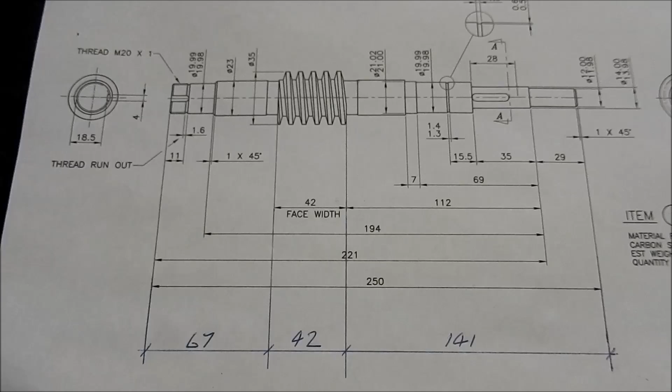Alright guys, since we've got the VFD up and going, we might finish off the transmission gear. Before we do go into the slides, this is the actual worm shaft. I've had to go back and do a modification to this. When I originally drew this, I drew it from the spec that I got from the eBay seller before I actually got the thing, and drew it up.

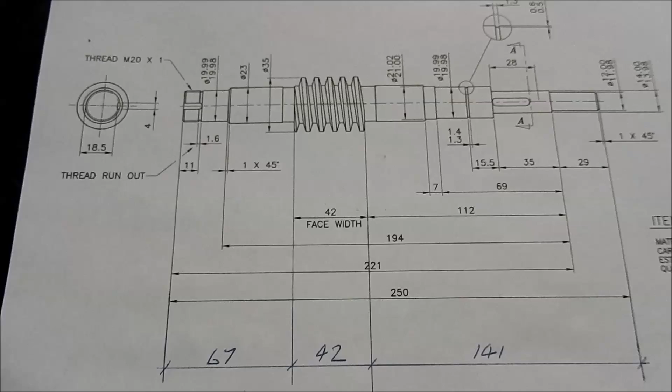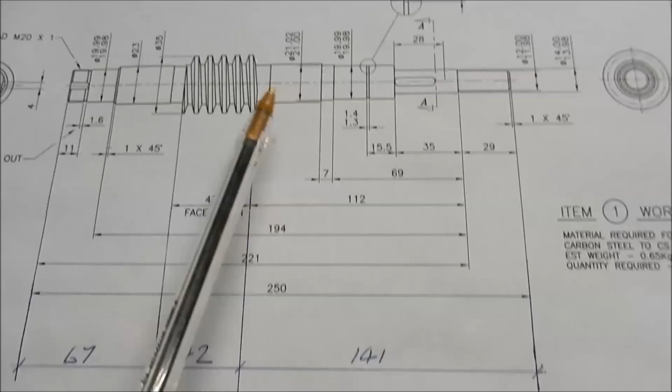But when I've actually gone to measure it now, the face width isn't 50, it's 42. So I've had to adjust everything sort of around that a little bit, which is fine. It's not going to affect the operation at all as long as we know about it. I've also lengthened it by about 2mm, which means I can use the stock length on this side without having to do any major machining.

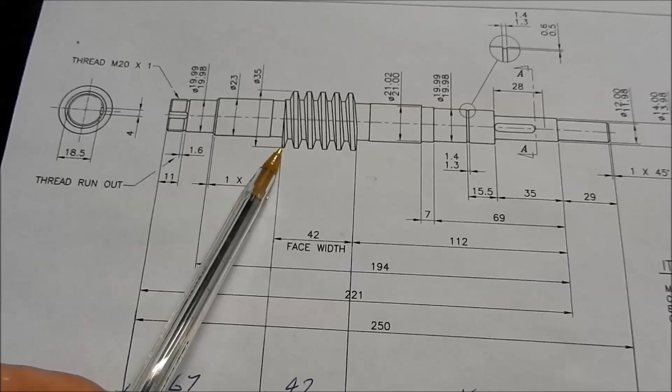I've got this set up in the lathe at the moment between centres just to see what the centres are like that are in here from the manufacturer. The important concentric face that I want to work to is actually the worm. Everything else can follow on from that. So I've got this set up between centres.

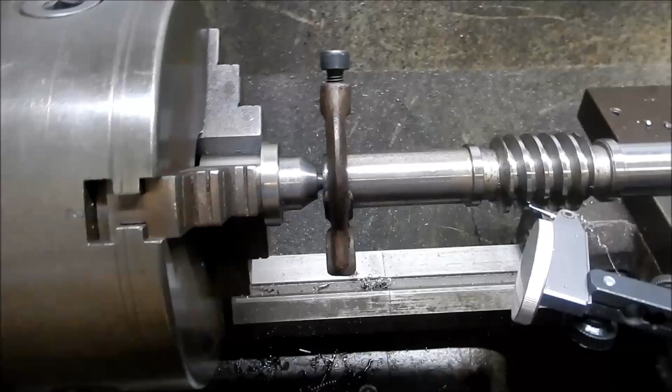I've actually just machined this centre to the 60° inclusive angle, so it's dead plumb with the centre line of the lathe. I've got my little lever indicator sitting on the worm, and I'm about 0.1 of a mil out of concentricity with that worm. So I'm not real confident about their centres.

So what I'm going to do is I'll go back to setting this back up in the chuck. I was a lot closer when I had this set up in the chuck. I was within about 0.03, I reckon. So we'll go back to the chuck to hold it, and we'll start machining up this long end here. So obviously their centres aren't quite where they should be, but that's okay.

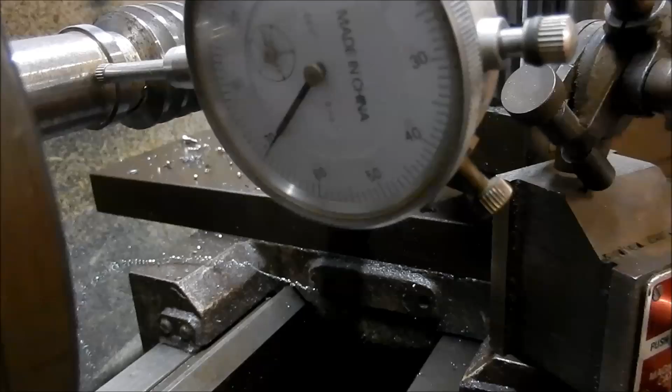Alright, so I've set it back up in the chuck. You can actually see this a little bit better. So if I run it round, well, it's less than half a thou. So I'm going to leave it at that. That's where we'll do our machining up at this end, so I'll get started on that. Right, so I'm happy with that concentricity. That's pretty spot on. Righto, we'll rough this out. We'll leave it a ½ mil or so oversize on all the diameters.

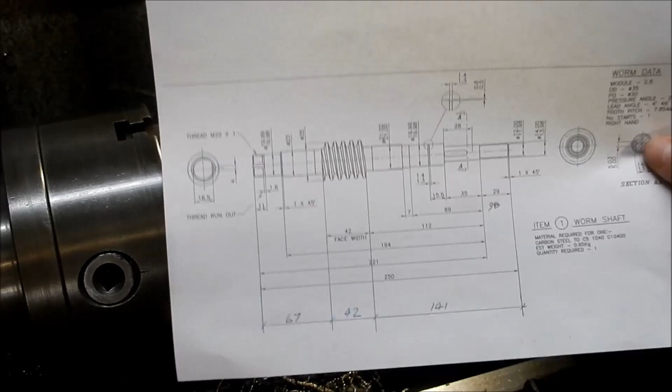Hope you can see that. So this is our bearing diameter just here. I'm going to make that a nominal 20mm, just so that bearing cone is just a very, very light push fit onto that. Other ones aren't so critical, we can match them up, but that's for our drive pulley. And this is a little extension I'm going to put off here in case I want to put some sort of handle or notch wheel or something like that on it, just to rotate it by hand.

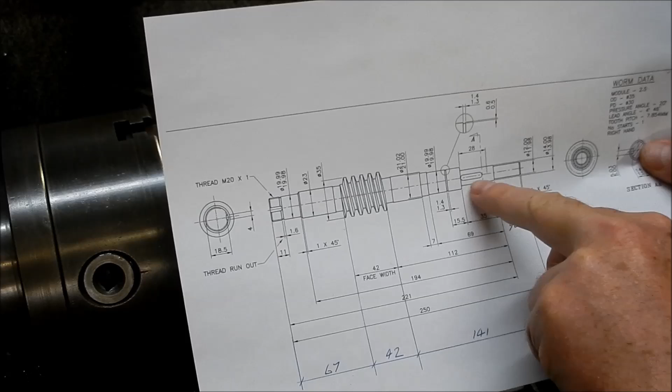This diameter up here is just a normal 23mm clearance, nothing critical. This is where we're going to put a little punch out washer onto here, so normal 21 on that. But this will be our critical dimension here. So anyway, we'll start roughing out each of the step sets until we come on down to get ready for finishing.

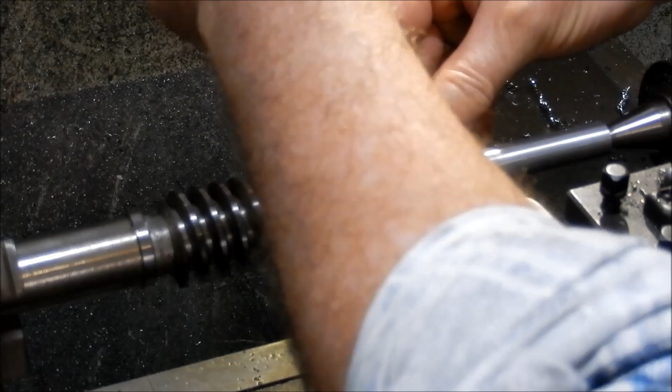Right, we'll set up for the finishing passes now. I've dropped my feed rate back. I actually found a good fast feed rate where it doesn't sound like the feed gearbox is going to destroy itself, so I've got a good combination I've just written down. I'll keep that. Rightio, so we're at 20.48, and our target size is 20 millimeters. So we've got 240 come off the radius.

Right, got 1, 2 left to go. I'm going to bring that down to the final bits. So take off 4. Right, we've got 0.025 left to go. Go on to the next diameter. Just a little punch out washer. Let's go 0.1 on that one.

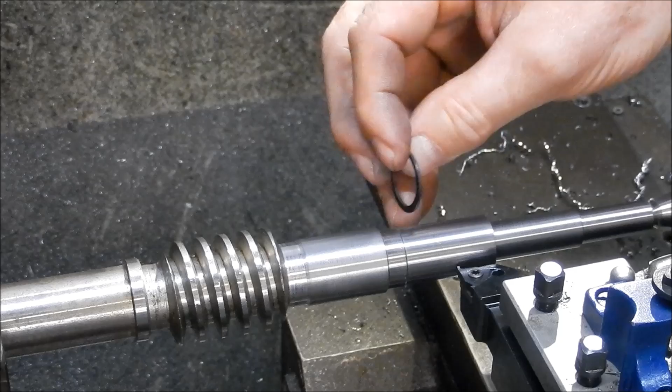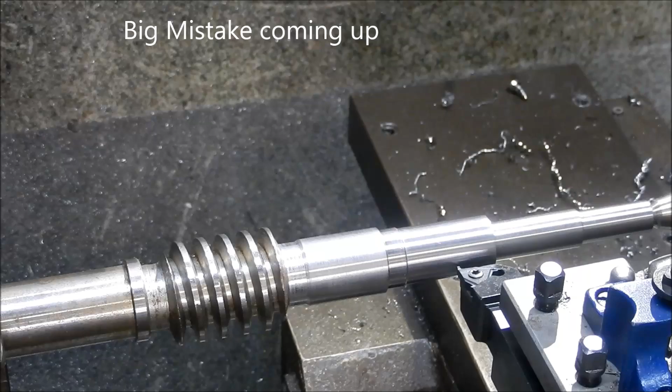Now I've measured the circlip and it's coming up at 1.15, so I want to make that a fairly tight fit. I'm actually going to make that 1.2. I'm going to tighten it up a little bit and we'll go to the maximum. Yeah, we'll go to the 1.3 depth anyway to get that little circlip into place, and then we've got a spacer washer between that and the bearing face. So let's see how we go. Excuse my arm, I'll just take my speed down a little bit.

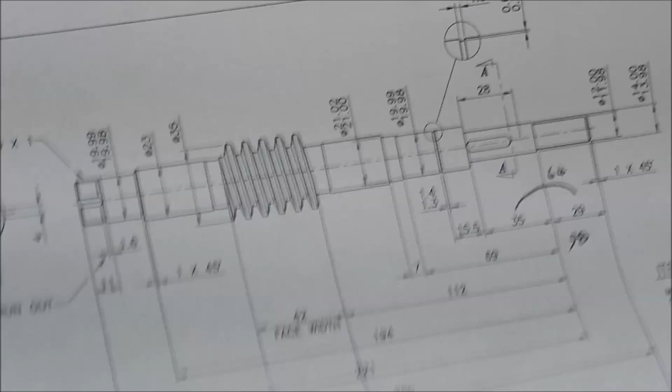Right, we'll try that on. Yep. Oh, jeez. What have I done there? Oh gosh. I'm reading the wrong... Should have gone 0.5. Alright, well, I'm not going to worry about that too much because it's not doing anything critical for us. It's just got a backup washer against it. So it's just a little bit of play in that. Yep, I think I'll leave it. Oh, bad mistake. Alright.

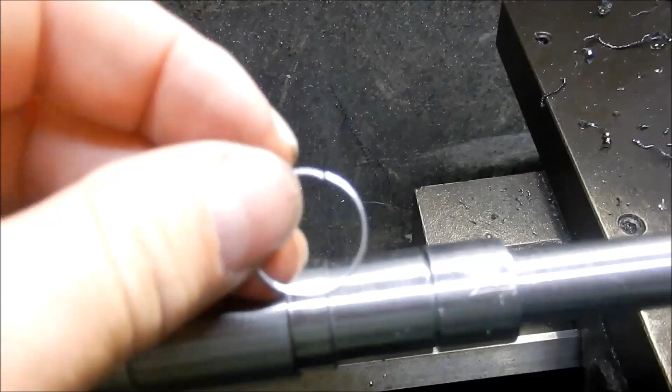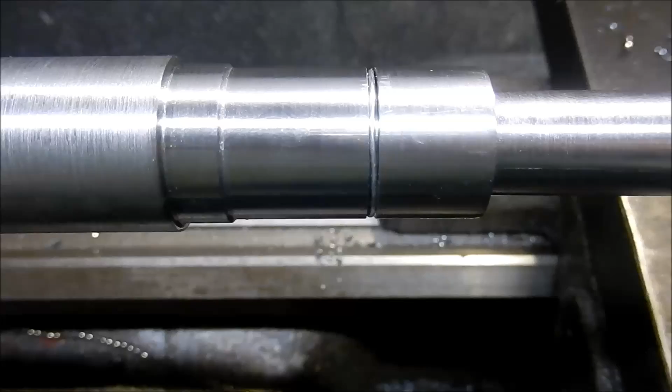Righto, so to fix up my little blunder, I've made up a spring steel little clip that's going to go in that groove, and that will bring it back exactly to the specification that we need for the depth. So I just fabricated that up out of a spring, so it's about 0.85 of a millimetre in diameter, which will bring it back quite nicely. So I'm going to fit that into place and we'll see how it looks. I don't know if you can see that, but that sits into the groove quite well. So we'll see how that goes.

Geez, if I had done this in one of the commercial shops I used to work in, you'd be frog marched out the door. Oh dear me, still suffering from the flu, still a bit fuzzy in the head, but anyway, we've made a mistake. It's about how we go about fixing it.

So I'll try the circlip on there now, and we'll see how that looks. Circlip on, and I'll tell you what, it takes a bit to turn it around. So what do you call getting out of jail? So that's a tight fit in that groove now. There's no slop on that whatsoever. So I'll leave that spring clip in there. It'll become part of the show.

Alright, well, we'll turn this around and we'll machine up this end here. Fortunately no circlips to machine in there. Well, I do have a thread to cut, the way I'm going, I'll cut the wrong pitch. Alright, we'll get this turned around and set up for the other machining operation. And we'll go to the mill and we'll cut the keyway into this for the timing belt pulley. And then up this end here we've got a keyway to cut for the retaining lock nut washer. So, alright, I'll go and bury my head in shame. Alright, I'll see you soon.

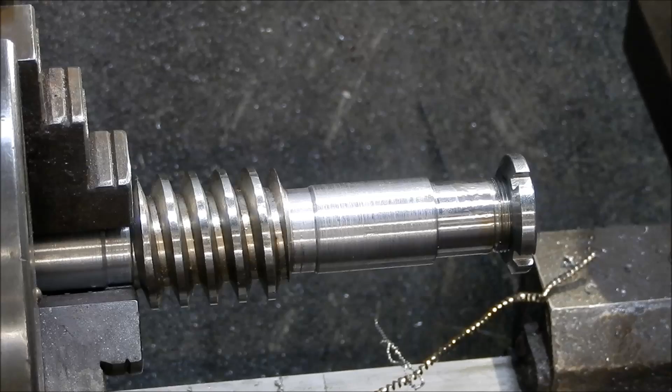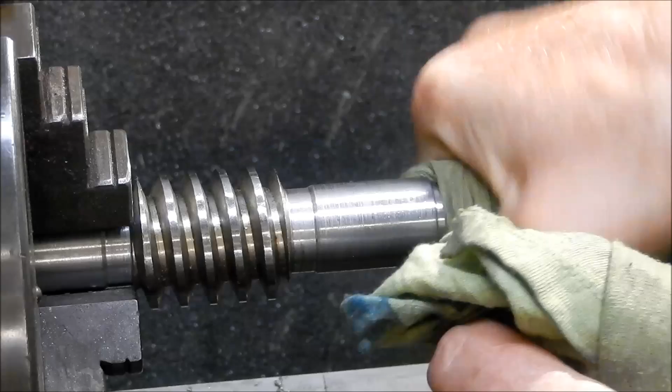That is very much spot on the money. I might just take a spring pass on that. It was 0.615 and the spec is just over 0.62. Oh, geez, I don't know. I might persevere and just... alright, that's it. No, we'll leave it at that. Alright, I'm happy with that.

Alright, so we finished the machining on this, albeit we made a little boo-boo on that circlip hole, but other than that, that looks beautiful. I'll clean that thread up with a bit of emery, just give it a bit of a buff. Everything else is on size, so alright. I'll get that tidied up and we'll come back onto the mill to cut those keyways.

Alright guys, we've got a couple of keys or keyways that we need to cut into this worm shaft. One is for the timing belt pulley up this end here, and up the other end, we can't see it yet, but up the other end there where I have the thread for the lock nut, we need to cut a 4mm wide keyway for the lock nut washer. But we'll do this one first.

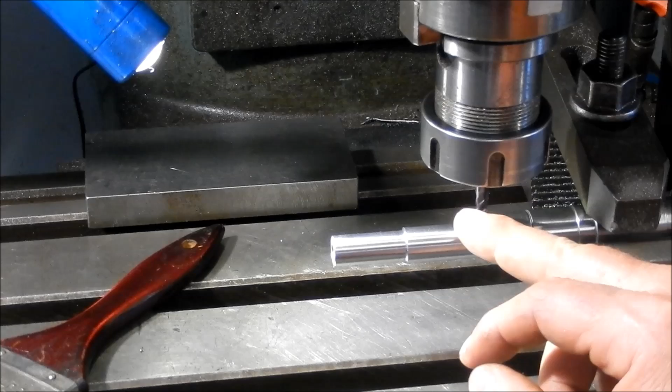I'm going to use a 5mm end mill as it is, so I'm not going to side cut. I'm just going to have a bit of a look and see how that width comes up when we do cut it in, and I'll check that with some gauge blocks and just see how close it is, because I can hand fit the key to these without any issues. But we'll get into it, and I've got everything zeroed out and squared up and centered, so we're right there. We need to go 2.88 on the depth, so there we go.

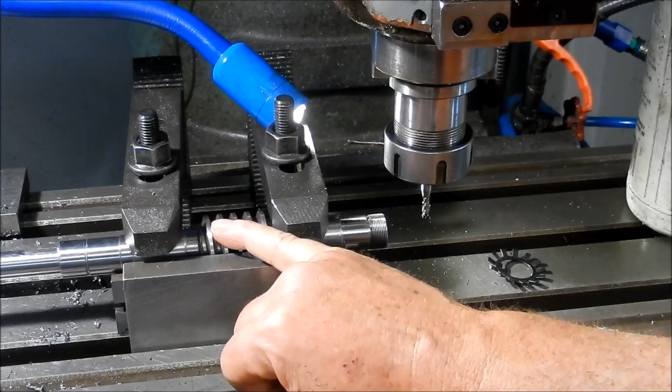And on the final assembly, when everything's set and done, we'll fit the bearings up to it and do its final assembly. But just for the time being, I'll just use a little bush. All right, well, I'll break this setup down. We'll remove the burrs off this, and we'll start on with some bearing assemblies.